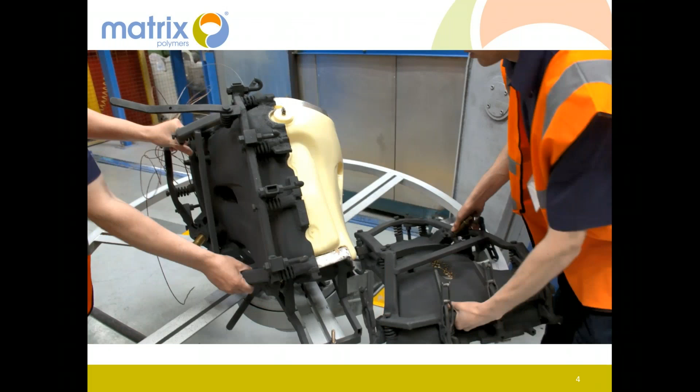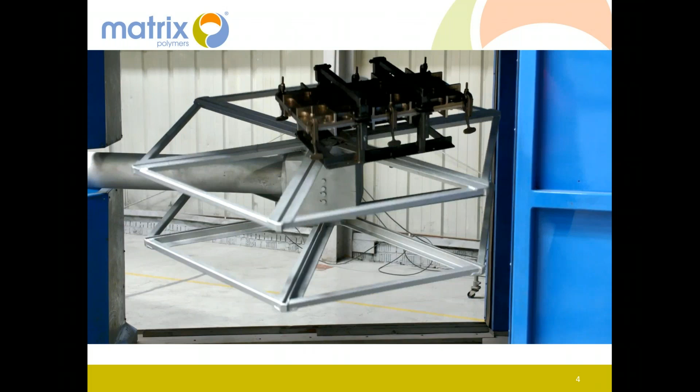Rohit ji has been kind enough to discuss a little bit about the background, who Matrix Polymers are and what we do, but I'll briefly touch upon some aspects. We are today the world's largest leading raw material supplier for the rotomolding industry, the one which is 100% focused on serving rotomolding alone. One of our key objectives is to bring in fresh ideas and exciting new materials to the market and expand the range of products that can be rotomolded.

A brief look at our manufacturing facilities across the globe. We are headquartered in Northampton, UK, with production facilities in Liverpool and Poland. The Liverpool plant was set up in 1997, spread across 4,500 square meters, with a production capacity of 18,000 metric tons annually, and houses 66 employees. It is ISO 9001:2015 certified.

The Kolo plant in Poland, established in 2005, has a production capacity of 30,000 metric tons annually, housing 69 employees, again ISO 9001:2015 certified. The Shah Alam plant in Malaysia was established in 2013, the recent addition to the Matrix group, with a production capacity of 15,000 metric tons annually, and we are growing. In addition to these three, we have plants in Australia and New Zealand. This gives us a well spread out reach across the globe that enables Matrix to service its clients locally and effectively.

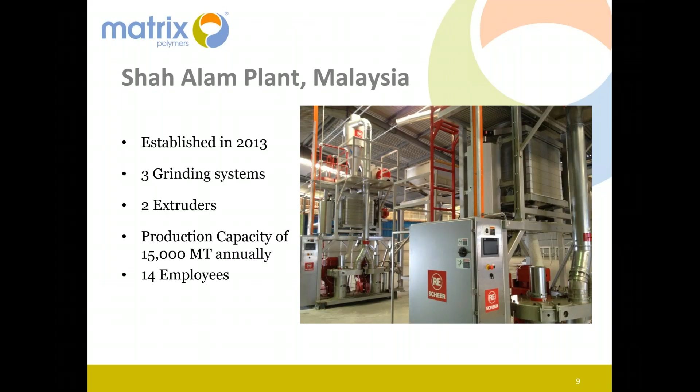Research and development at Matrix is a serious business. Remember, I told you one of our key objectives was to bring in fresh ideas and exciting new materials. Matrix has very strong technical roots; we are heavily invested in research and development, and more on this will come from Aldo later in this presentation. In short, we have research and development in our DNA. We believe if you have to be world leaders, you have to be the first ones, ahead in invention, research, development, and the race. Team Matrix likes to work in close collaboration with its customers, and we have strong partnerships with our suppliers, some of the world's largest petrochemical companies.

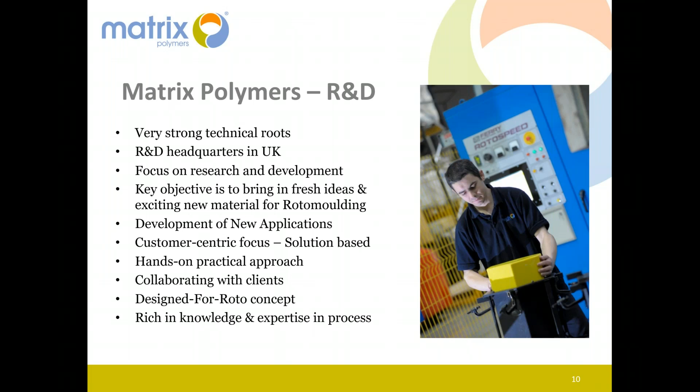Designed for Roto: Matrix Polymers offers one of the widest ranges of materials for rotomolding, and several of our key grades have been developed under our Design for Roto concept. These are made to our own recipe and produced exclusively for Matrix alone. Our growing infrastructure means we can work with OEMs in each region, and we are able to supply them globally. Over the next few slides, we will cover product offerings for the automotive industry, ranging from conventional polyethylene to more specialized items like nylon or PA12.

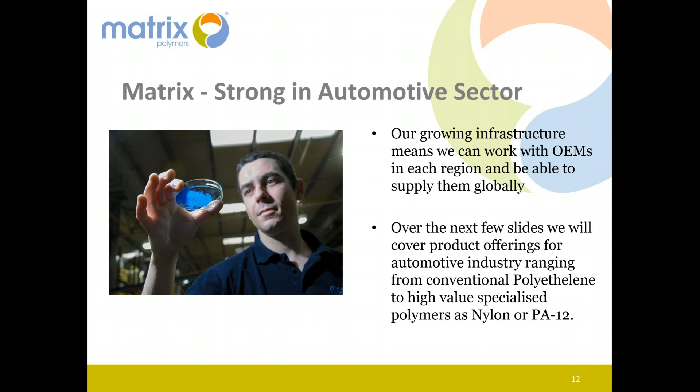The genesis of today's presentation shall be built upon a startling fact. The modern day world of advanced cars is dominated with plastic, accounting for not less than 50% of its total volume. And yet, this amounts to just 10% of its total weight.

So the key here is light weighting. Metal is heavy, plastic is not. So what are the emerging trends, and what does the future show? Four things: high quality materials are being developed, emergence of new technologies, electric vehicles, and of course, increased regulation and compliance.

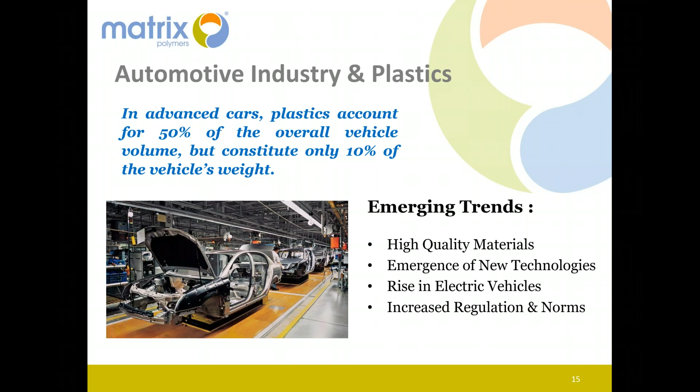There was a time when plastics were considered a cheap alternative material for non-critical automotive components. Now the advancement in plastics has led to a massive metal to plastic conversion. Why plastics? Heat and chemical resistance, high impact strength, molding capabilities, and much more. Plastic is versatile, metal is not.

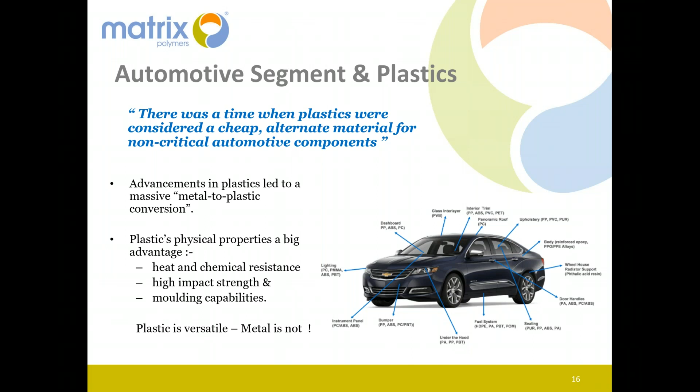There was a time when steel was the material of choice for fuel systems. Not only was steel an excellent barrier against fuel vapor, but the price too was an advantage. But you had problems: leakage and corrosion. Enter plastics, and a revolutionary change has been witnessed by all. Improvement in safety, improvement in weight, improvement in cost, improvement in durability. What more could you want?

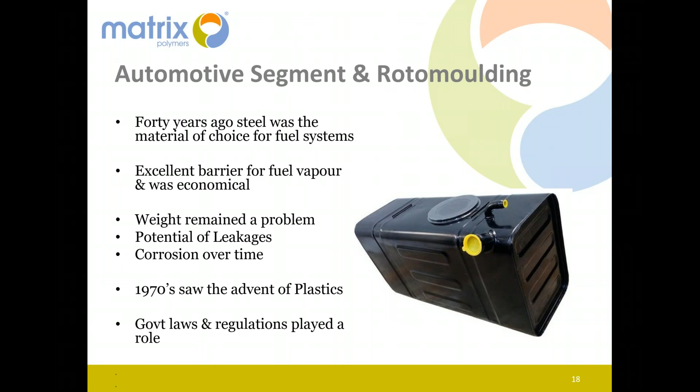Plastics coming into being means there is more safety, permeability, weight, durability, and all these factors taken care of. You have innovative designs that can be manufactured, new manufacturing techniques, and high impact strength plastics are being developed. You have corrosion-free plastic tanks, reduction of weight, and that is what has led to new materials like PA6, PA12, M950, and the rest, which we'll be talking about in the course of my presentation.

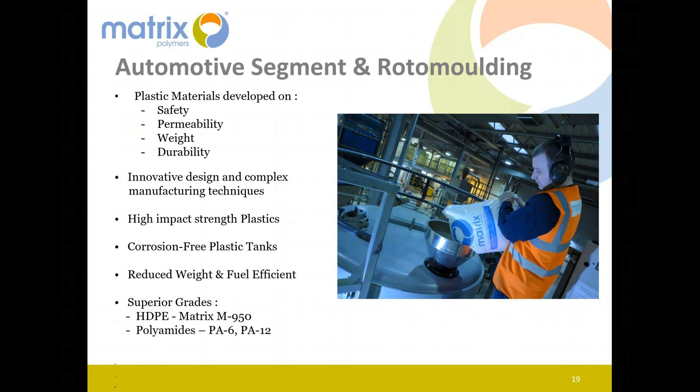Let's have a look at the automotive segment and rotomolding. About 5 or 6 key points I'd like to mention: we are witnessing the development of specialized polymers, many new components coming within the fold of rotomolded applications, much more flexibility of design, excellent detailing and finish, no wastage or scrap, and the possibility of double wall constructions. All of this is cost efficient.

If you were to look at becoming an OEM supplier, you need to be aware of certain things auto majors look at. For applications that are rotomolded for the automotive segment, they're looking for high aesthetic requirements, durability and toughness, tight tolerance levels, pinhole-free technology, scratch resistance in materials, weight reduction, low CO2 emission standards, high temperature resistance, and conductivity. The result? It leads to a wider selection of materials.

I have tried to list down some of the key things automotive players need to be wary of. But before that, when we look at the automotive segment, we'll divide it into 5 major categories: two-wheelers, three-wheelers, commercial vehicles, the agricultural sector comprising tractors and trailers, and of course private cars.

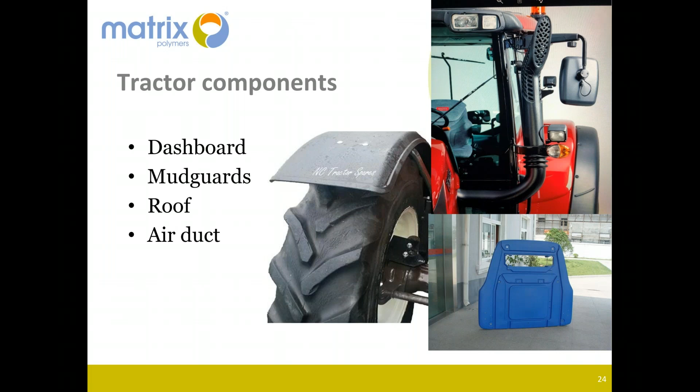Now, fuel tanks is a very, very wide topic. If we were to devote an entire day discussing fuel tanks, I think we would fall short of time. But we'll just try to look at fuel tanks, maybe for different categories, and then look at what kind of materials work in this segment.

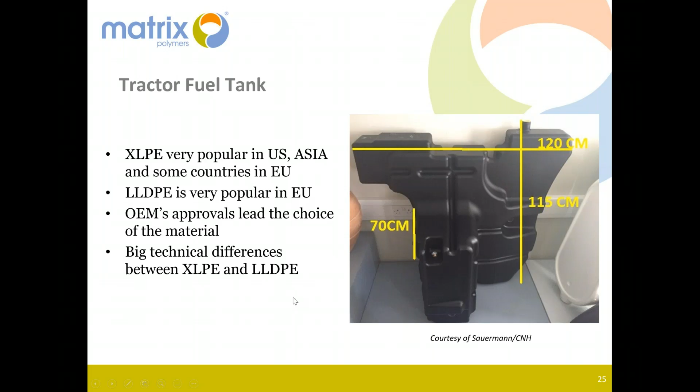Plastics are utilized for processing numerous automotive components and parts, fuel tanks being one of the most significant for rotomolders. Unlike with metal, material suppliers such as Matrix are now able to tailor the performance characteristics of plastic resins to meet a designer's particular needs, adjusting additives to align with specific requirements. The day is not far when fuel tanks made from metal shall be consigned to the museum where they truly belong.

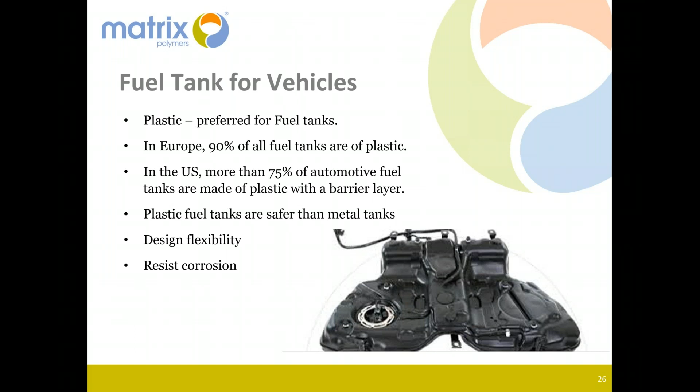Why should fuel and hydraulic tanks be rotomolded? Well, the benefits are enormous. Rotomolded fuel tanks allow for innovative design. They offer high impact strength that helps retain integrity even on impact. There is less risk of leakage. Plastics do not corrode, and of course, plastic fuel tanks help reduce the weight of the vehicle.

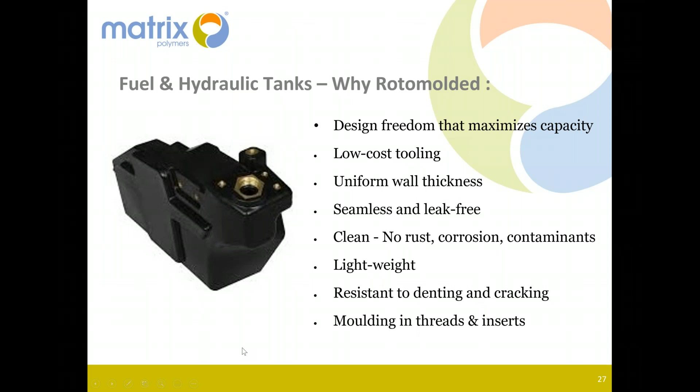AdBlue tanks. Now that BS6 comes into effect, with new emission norms laid down by the government, you get to hear about AdBlue tanks more and more. Technologies are clearly changing, and the AdBlue tank is one such addition we will be hearing a lot about in the future. That is a distinct new opportunity for rotomolders.

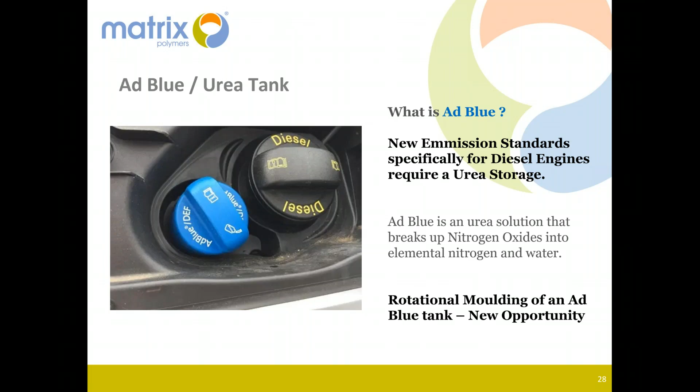Fuel tanks for motorbikes. There is so much noise about petrol tanks for two-wheelers amongst Indian rotomolders in recent times. The future looks to hold a lot of promise.

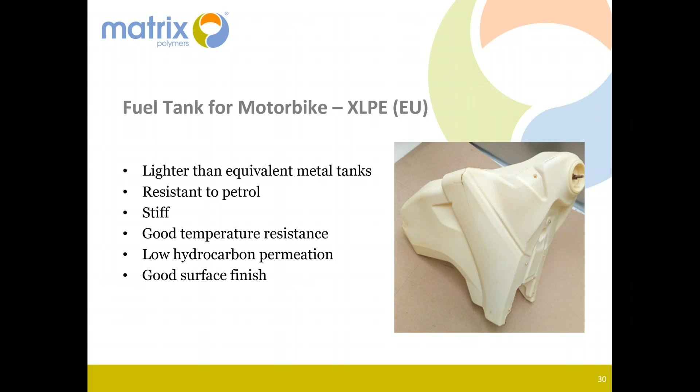There are many more applications that could be discussed. What needs to be understood is that as technologies evolve and newer, better materials get developed, more and more product applications begin to emerge.

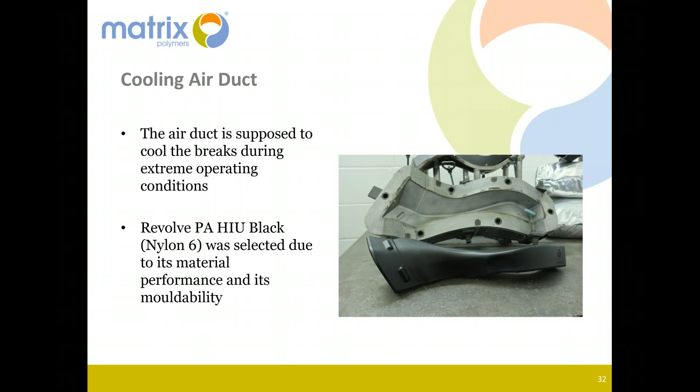Now, if you're aiming to become a rotomolded supplier for the automotive segment, it makes sense to understand what these companies are looking for. What are the prerequisites for a high quality supplier for, say, fuel tanks?

One, quality. You need manufacturing excellence and consistent quality. Production is going to be key. Product customization requires expertise in execution of design. Experience: your pedigree and experience has to be top-notch. Precision and consistency, capacity and throughput, the right material. You need to align with quality material suppliers. You need to be cost-effective. And above all, understand that you are always going to be regulated within the legal framework of approvals and compliances.

Now, what determines the choice of material? I shall try to explain how we, as material suppliers, look at creating different materials for automotive roto products.

The call for higher performing polymers is challenging resin suppliers with each passing day. This is because polymer manufacturers have to adapt their product offerings, or grades, such that the right materials are created to cope with any fuel under any set of circumstances. So for us at Matrix, it is always about raising the bar a little higher each time, every time. Some factors we need to consider in developing material for rotomolded products are listed out here.

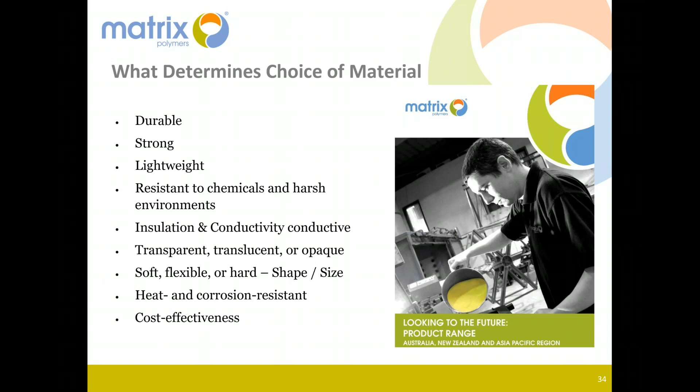I'll give you a sneak peek into some of the materials that Matrix offers amongst its wide range of materials for rotomolded applications. Most of these grades you see here are commonly used across Europe and the rest of the world. Not all of them in India, although I would love to see them all come to India.

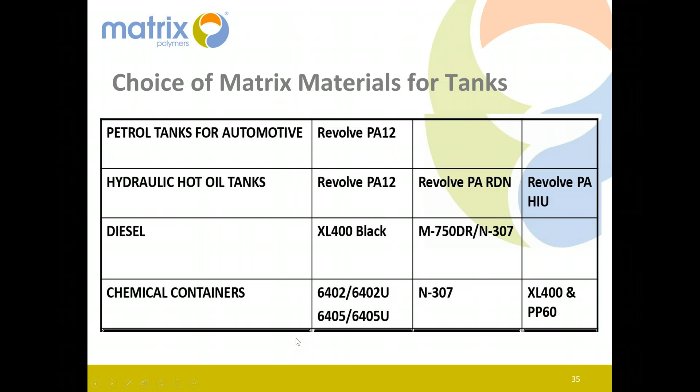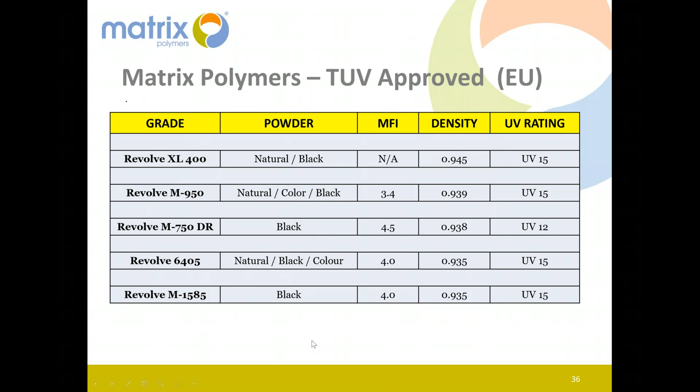Now, I would possibly need an entire day or two if I were to discuss in greater detail all the various grades that Matrix offers for the automotive segment. That should perhaps be left for a technical workshop that Matrix Polymers would be keen to host for rotomolder members in the near future.

Having said that, let me take you through some of the most popular and most in-demand grades that have been embraced and adopted by the Indian automotive industry. Just to give you an idea and a feel of what Matrix stands for, and why it makes sense to align with the best.

Revolve 6329U perhaps would not need an introduction for most of you rotomolders. It's a hexene grade that offers a 0.939 density, an MFI of 3.2, and a UV15 specification. What are the benefits of using Revolve 6329U?

Its durability, high tensile strength, flexibility of material and design applications, simplicity of changing colors and matching custom colors.

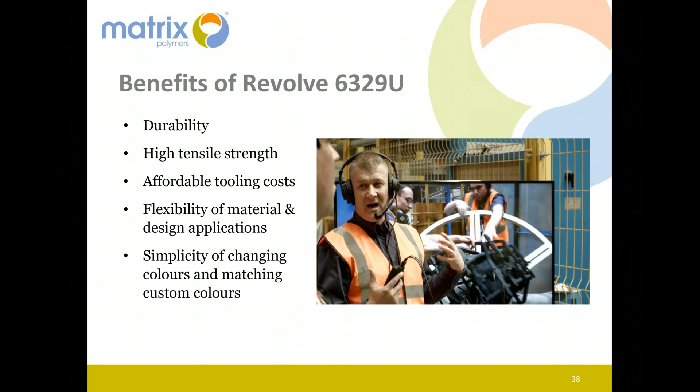That brings me to my favorite, XL400. Now, since there is so much demand for XL400 in India, as much as in Europe, or for that matter in Australia, I would be glad to share with you a video that shows a fuel tank made from this particular material. Some of you might have already seen it on the internet, but it's worth a watch anytime.

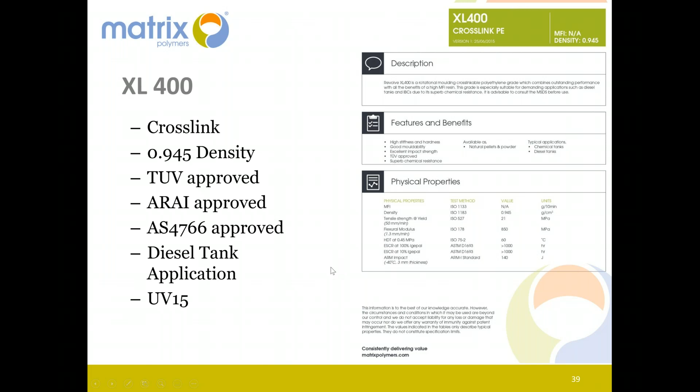Okay, we talk about the benefits first. It's suitable for diesel tanks, offers more rigidity, is lightweight and strong, good for intricate designs and shapes, corrosion resistance, abrasion resistance, and of course, UV15.

Let me show you the video clip.

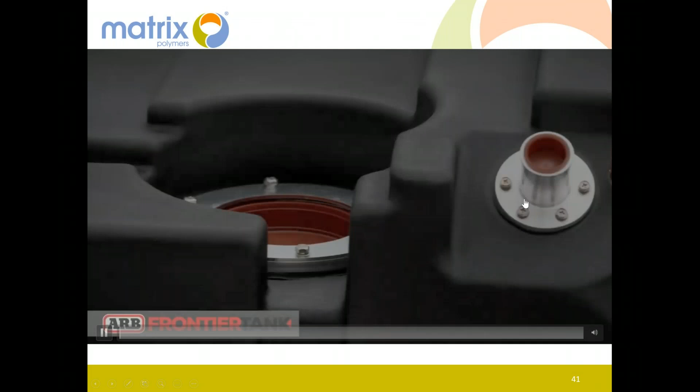Remember, that was XL400.

Then we talk about Revolve M950, again a hexene grade, 0.939 density, an MFI of 3.5, and it's widely used for diesel fuel tanks. It's TUV approved, ARAI approved, and comes with UV15.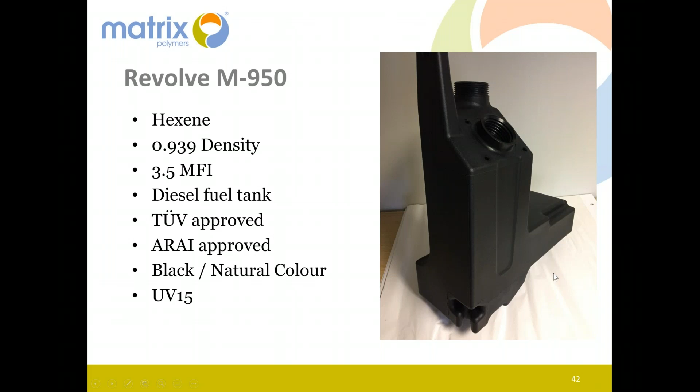What are the benefits of M950? Again, high tensile strength, good moldability, excellent impact strength, lightweight characteristics. It's less expensive compared to Crosslink and is suitable for complex designs.

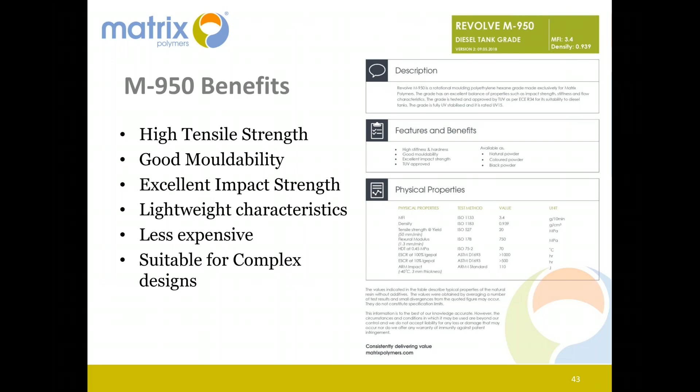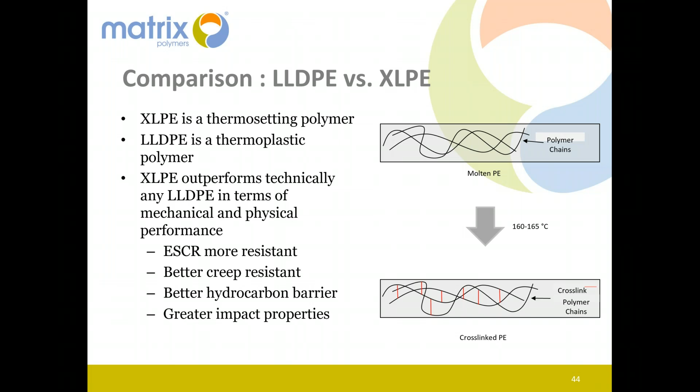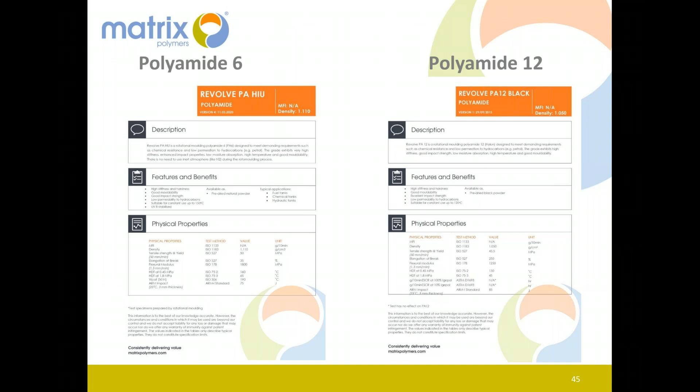Some of the benefits of PA6: high strength and stiffness at high temperatures, good impact strength, very good flow for easy processing, good abrasion and wear resistance, excellent fuel and oil resistance, excellent surface finish, good electrical insulating properties.

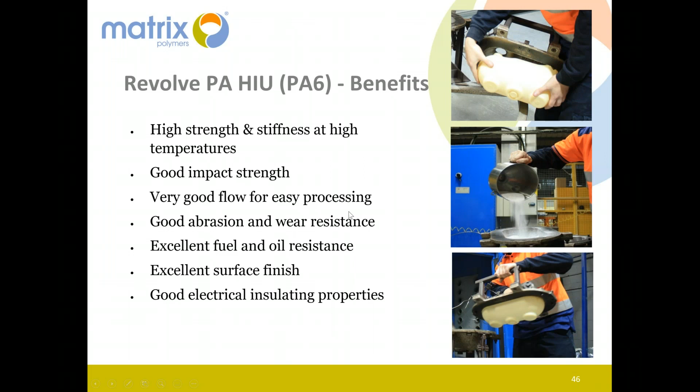Polyamide 12 offers excellent hydrocarbon barriers. It's ideal for petrol tanks, excellent chemical compatibility, good impact resistance, high stiffness, high operating temperature resistance, the easiest nylon to rotomold.

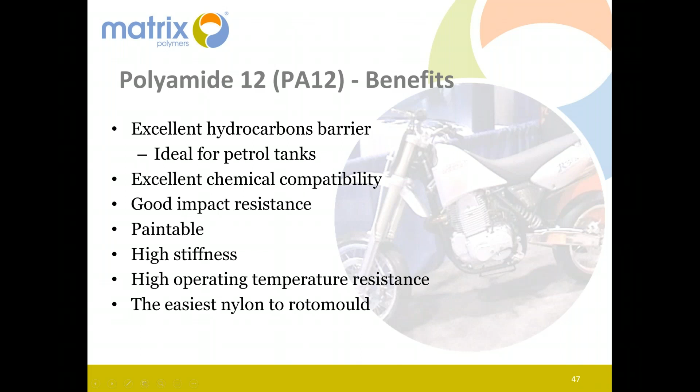Now in the EU, there is an industrial practice to use crosslink for motorbike fuel tanks. But it's worthwhile to mention that PA12 offers a better hydrocarbon barrier against permeation, and we would always recommend the use of PA12 over XLPE.

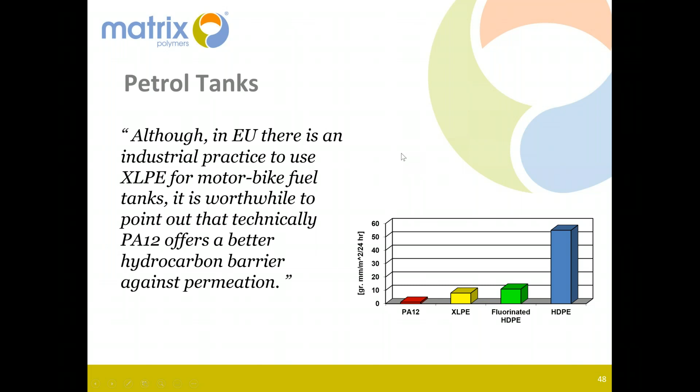With the rise of electric vehicles, new technologies, and tougher fuel emission norms, the automotive industry will enter into a high growth trajectory sooner than we think. And so will the rotomolding industry for automotive products. Manufacturing will look to make lighter, less expensive components. There is going to be innovation in materials, no doubt, as much as in products that can be rotomolded, which will be backed by innovation in design and execution.

They say with the advent of the COVID virus, social distancing is the new normal. With automotive rotomolded products, lightweighting is going to be the new normal.

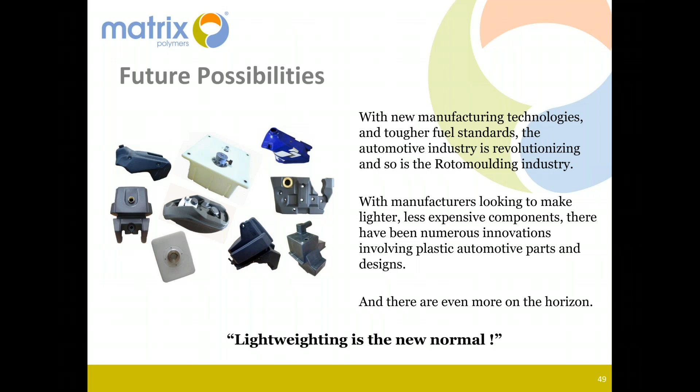Moving on, this presentation would be incomplete if I did not talk about BS6 norms, its impact, and why rotomolders should be happy. Let me try and decode it as simply as I possibly can. BS6 stands for Bharat Stage, which signifies the emission regulation standards set by the Government of India. These emission standards are set by the central government to keep a check on the pollution levels emitted by vehicles. Basically, BS6 norms act as a good reference point as to how much a vehicle pollutes.

The central government has mandated that all vehicle manufacturers, both two-wheelers and four-wheelers, should manufacture, sell, and register only BS6 vehicles from 1st April 2020, which implies it's already come into effect.

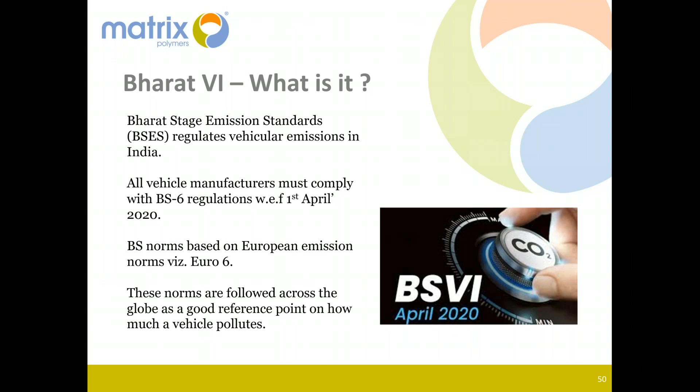Now, the newly introduced BS6 norms are going to bring in a radical change. India will get more fuel-efficient vehicles, no doubt. This is going to bring about substantial enhancement in the air quality of highly populated cities. But at the same time, new materials are going to get developed for alternate fuel systems. Lightweighting of vehicles and hence more usage of plastic parts. Environment-friendly technologies will come into play.

Regulators will define the future. Automakers will decide the menu. Polymer suppliers will prepare the recipe, and rotomolders will host the party. Where you stand on this issue depends upon where you sit.

Electric vehicles, my favorite subject again. EVs, as we commonly refer to electric vehicles, sales are accelerating worldwide. They are now projected to grow to as much as 50% of worldwide vehicle sales by 2040, up from just about 1% in 2016.

The rise of electric vehicles is a key issue to be considered when you evaluate the automotive outlook and subsequently polymer demand. Plastics such as polypropylene, polyethylene, and polyamide are expected to witness growth, specifically for electric vehicles. And Asia Pacific, mind you, is expected to exhibit higher growth rates in comparison to mature automotive markets, because the current average plastics consumption in developing economies is comparatively lower.

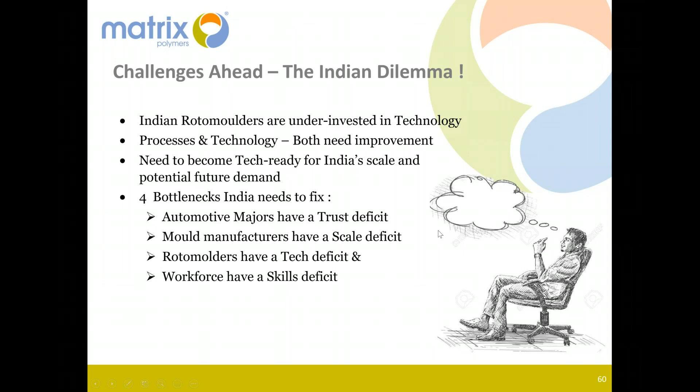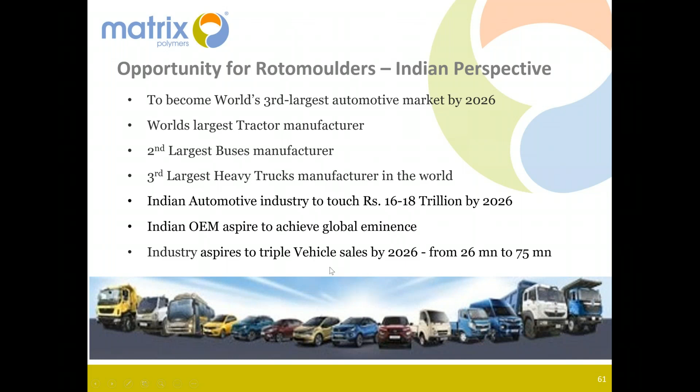So just to conclude this presentation, what we are facing is unprecedented in terms of scale and change that is about to come. Polymer manufacturers will innovate and create new product offerings. Durable heat-resistant polymers that reduce weight will be in high demand. Rapid growth of electric vehicles will open up new opportunities for rotomolding materials and applications. A trusted relationship between material suppliers and rotomolders is imperative. And of course, the automotive industry of tomorrow is going to use more plastic, not less.